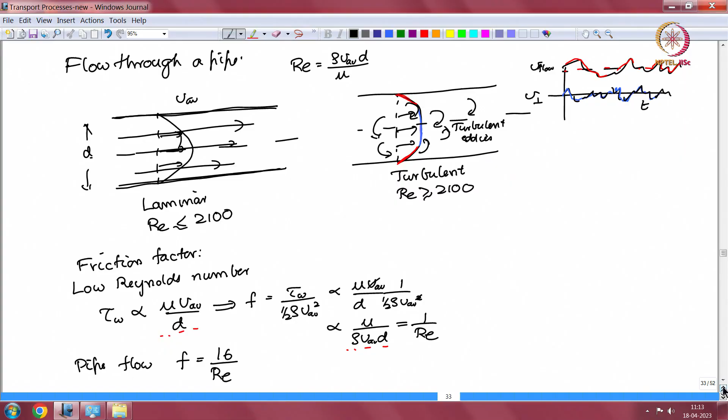So, in the last few lectures we have been looking at correlations for momentum transfer. Momentum transfer in the flow through conduits, we had looked at pipe flow if you recall, where we had distinguished between two regimes, a laminar and a turbulent regime.

What has to be predicted here, the dependent dimensionless group, is the friction factor, which is a scaled wall shear stress, and it is also a measure of the pressure difference across the pipe required in order to drive the flow. That is a function of the Reynolds number based upon the average velocity and the pipe diameter and the fluid density and viscosity.

And just from dimensional analysis, the friction factor is a function of Reynolds number. It is different depending upon the flow regime, whether we are in a laminar flow or a turbulent flow.

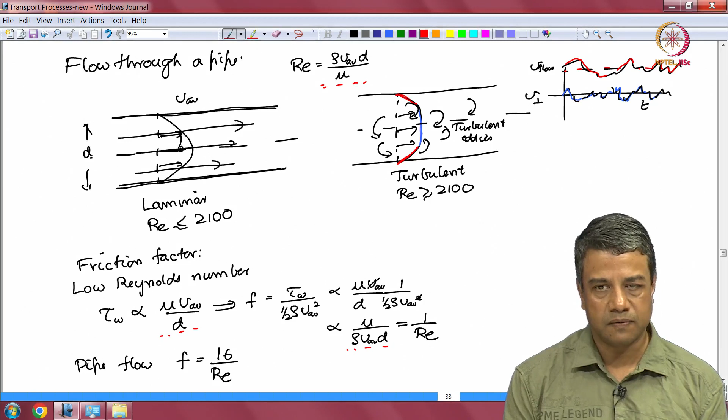Laminar flow with straight smooth streamlines and no cross stream velocity fluctuations, the flow profile is parabolic. Turbulent flow with turbulent eddies mixing across the cross section of the pipe, the velocity profile is more plug like at the center and sharper at the walls, and there are fluctuations in all three directions in a turbulent flow, even though on average the velocity is only along the axis.

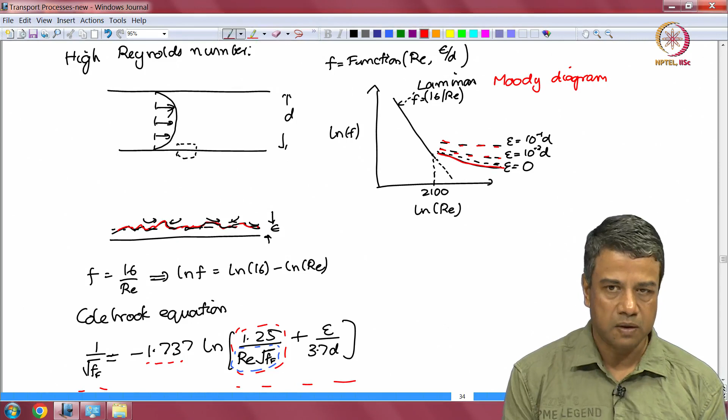And the friction factor is 16 by Re for low Reynolds number, and it varies at high Reynolds number depending upon the wall roughness, and I had discussed a correlation for the pipe flow.

Flow past a flat plate with negligible projected area perpendicular to the flow. The drag force on this flat plate is primarily due to the shear stress exerted on the wall. Once again, the flow regime depends upon the length in this case.

If the Reynolds number based upon the downstream position is less than about 5 into 10 power 5, the flow is laminar. Beyond that it becomes turbulent.

The stress exerted by the plate on the fluid causes a disturbance to the velocity of the fluid within a boundary layer of thickness delta close to the surface. That is because momentum is diffusing from the surface and it is getting convected downstream. Therefore, the effect of the plate is felt only within a boundary layer close to the surface, and we had looked at the scalings for that boundary layer.

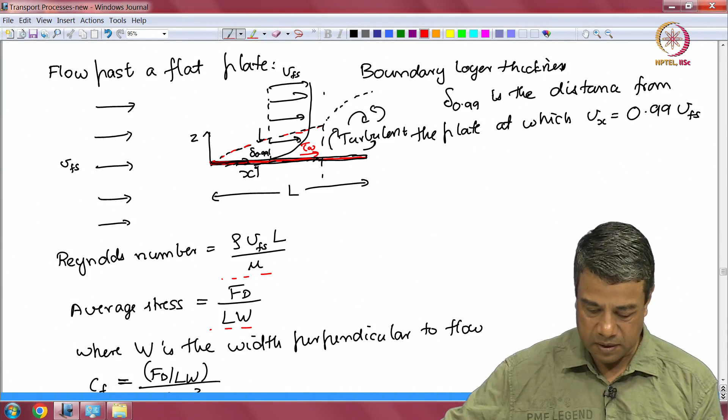It goes as the boundary layer divided by the downstream location scales as Re power minus half in a laminar flow and minus 1/5 in a turbulent flow.

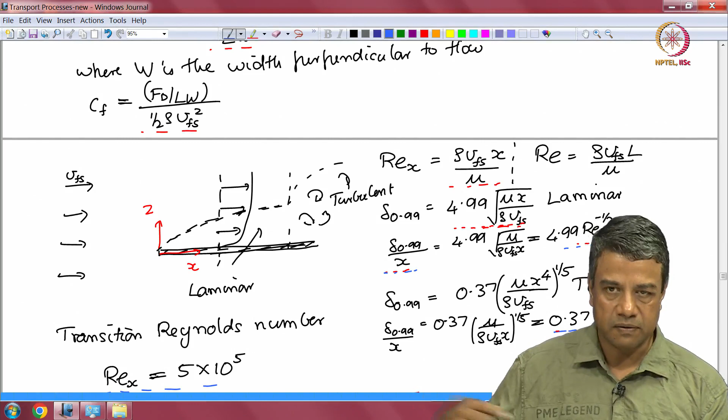And we had also looked at correlations for the skin friction coefficient. The drag force per unit area tangential to the flow per unit area of the surface divided by half rho times the free stream velocity square.

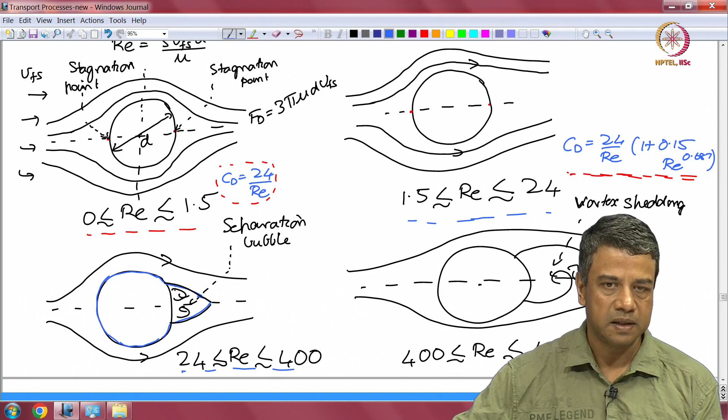We had looked at flow around a particle, the different flow regimes, all the way from the laminar flow with symmetric streamlines between the downstream and the upstream hemispheres, down to inertial effects for Reynolds number greater than 1.5 less than 24 causing an asymmetry, and then there is a separation bubble at the rear.

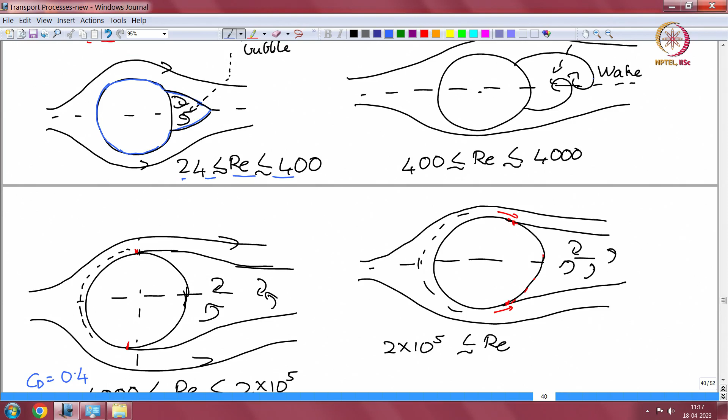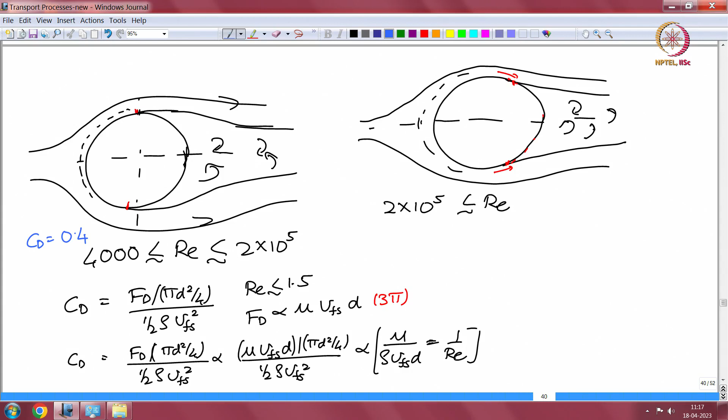This separation bubble, when the Reynolds number increases above about 400, you get vortices being shed periodically in a wake region. Above about 4000, you do not have this periodic shedding, it becomes a turbulent flow in the wake. And when the Reynolds number exceeds 2 into 10 power 5, the wake is turbulent, the attachment points of the wake shift downstream, and you have turbulent flow in the boundary layer upstream as well.

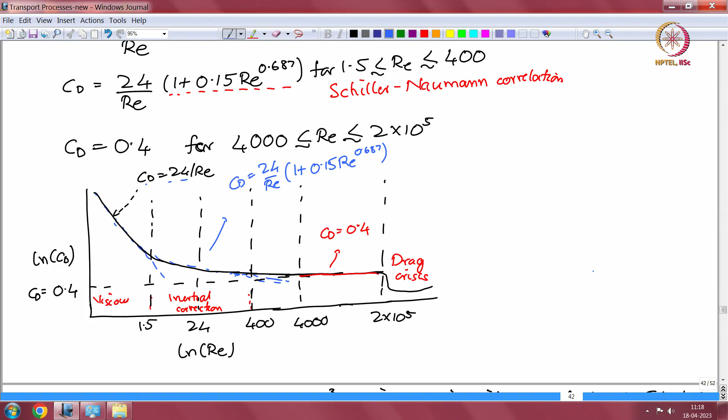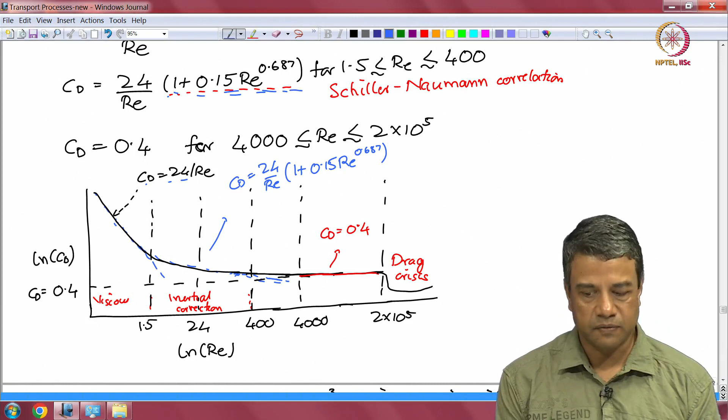And we had looked at the drag coefficient as a function of Reynolds number. Less than about 1.5, Stokes drag law is valid, and CD is 24 by Re. Above 1.5 till about 400, you have a correlation which incorporates the effect of inertia at low Reynolds number. Above about 4000 or so, the drag coefficient is a constant about 0.4, and at 2 into 10 power 5 you get a drag crisis.

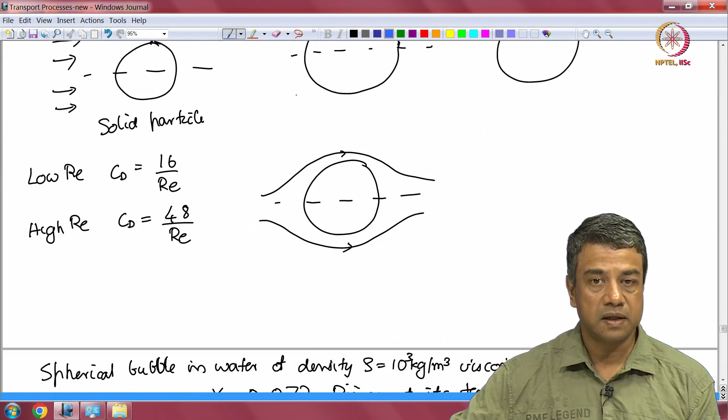The correlation for the bubble does not contain all these complications because the flow profile does not contain all these complications. Provided you are in a clean liquid with a clean interface, no surfactants etc., there is no boundary layer separation and so on.

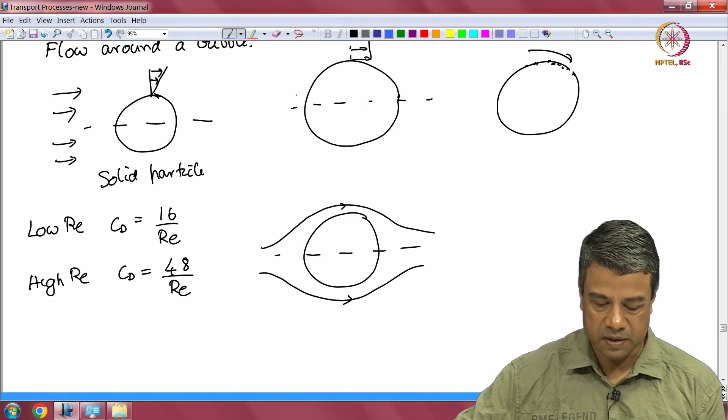The flow can be well approximated by a potential flow, there is no turbulence. At low Reynolds number, the drag coefficient is 16 by Re, and at high Reynolds number it is 48 by Re.

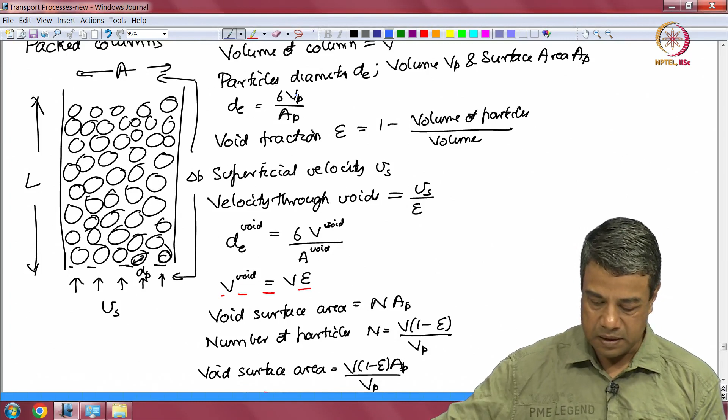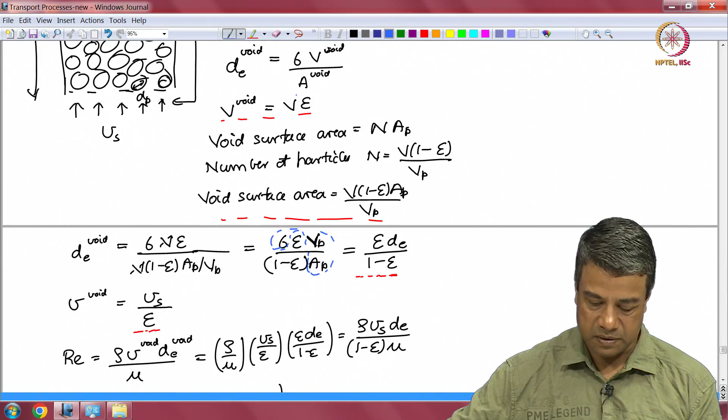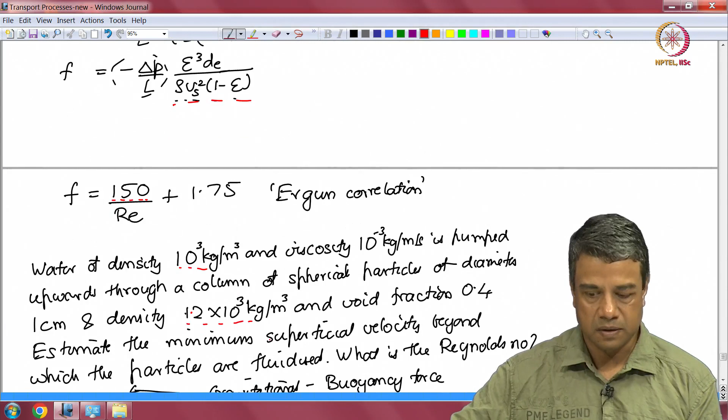And we had looked at the definitions for a packed column as well. One has to be careful in how to define the equivalent diameter and the velocity through the voids. You have to look at the void equivalent diameter and the void velocity, and those are related to the particle equivalent diameter and the void fraction. These are ultimately the parameters used for defining the Reynolds number and the friction factor, and these are the definitions. We had also discussed the Ergun correlation for the friction factor versus Reynolds number in this case.

So now we will look at mixing, an essential component of many unit operations.

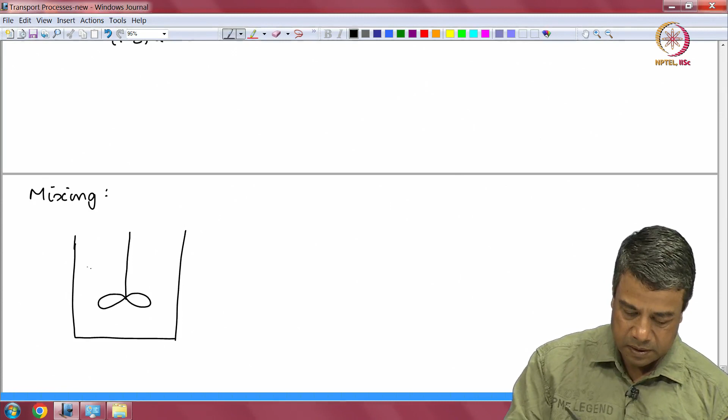Typically, in a reactor you have an impeller that is rotating and mixing the fluid. The design criterion here is likely to be: for a given volume of fluid and for a given impeller geometry and shape, what is the power required to mix this fluid? What is the torque required for this?

A complicated geometry is a priori difficult to solve. So what is usually done is to make a scale model.

In which all the geometrical dimensions are kept constant, that is the ratio of the impeller width to the tank diameter, the length to height, the cross section to the height of the tank, the level of fluid, etc., is all kept constant between these two.

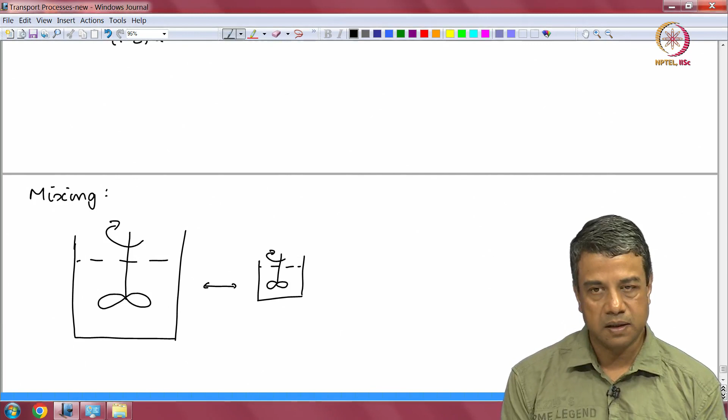And in this scale model, which is maybe 10 times or 100 times less, you would like to measure what is the power required in this model, and then relate it to the power required in the actual system. When you do this, the ratio of all length dimensions has to be kept constant for similarity between these two.

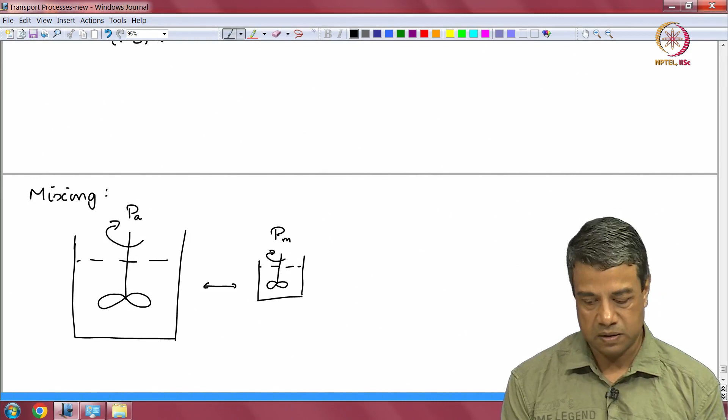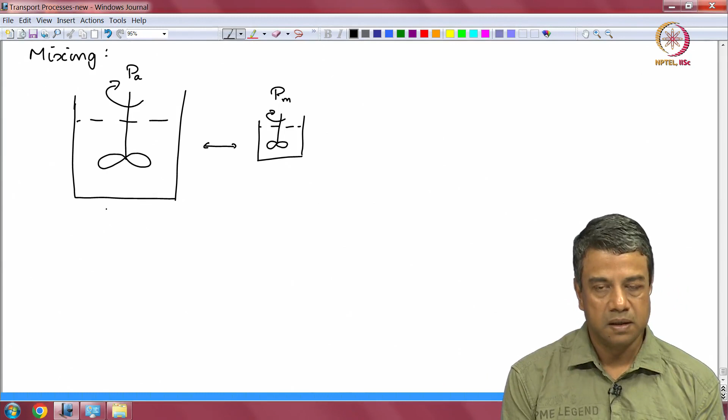However, also to be kept constant are the relevant dimensionless groups. So rather than expressing this in terms of the total power required, you would like to express it in terms of the power number. The dependent dimensional variable is the power required.

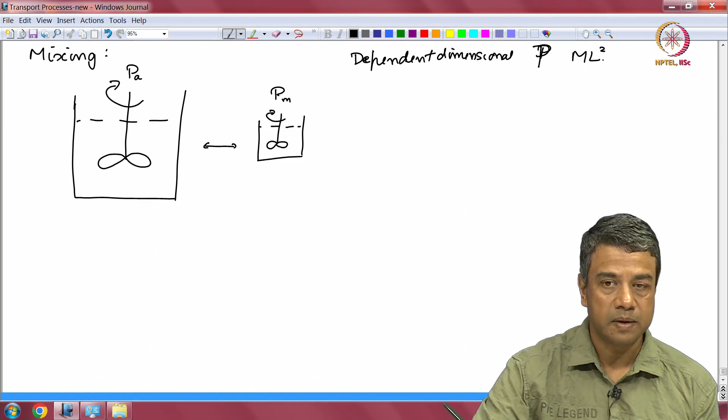That is, the power required in order to drive this impeller. This power has dimensions of mass length squared time to the power minus 2 for energy; power is energy per unit time, so it becomes mL square T power minus 3. Recall that force is mass into acceleration, mL T power minus 2, energy is force into distance, so mL square T power minus 2, and power is mL square T power minus 3.

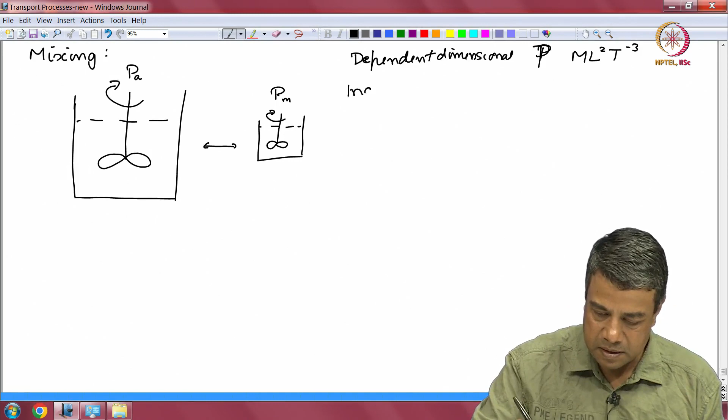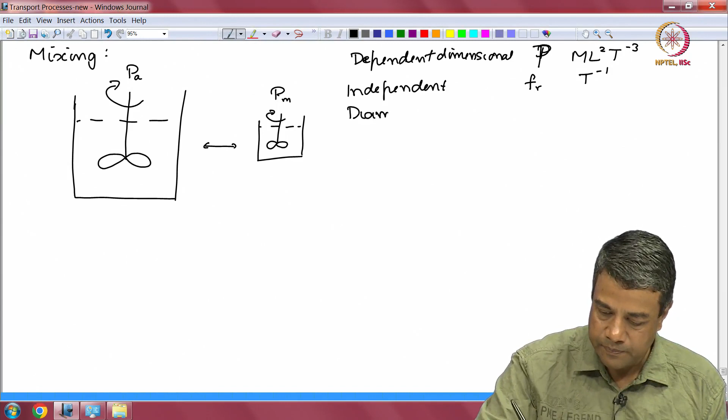This power can depend upon various independent dimensional parameters. It could, for example, depend upon the frequency of rotation Fr, which has dimensions of time inverse, that is the number of rotations per unit time, per minute or per hour and so on, and the diameter d, with units of length.

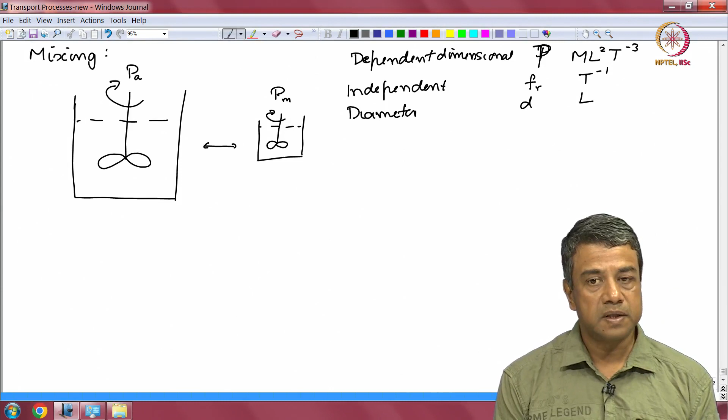And of course it depends upon the fluid properties: the density rho, with dimensions m L power minus 3, and the viscosity mu, with dimensions m, L inverse, T inverse.

So now the power number has to be defined based upon these parameters. There is one dependent and four independent parameters, and therefore there is one dependent and one independent dimensionless group, for scaling the power.

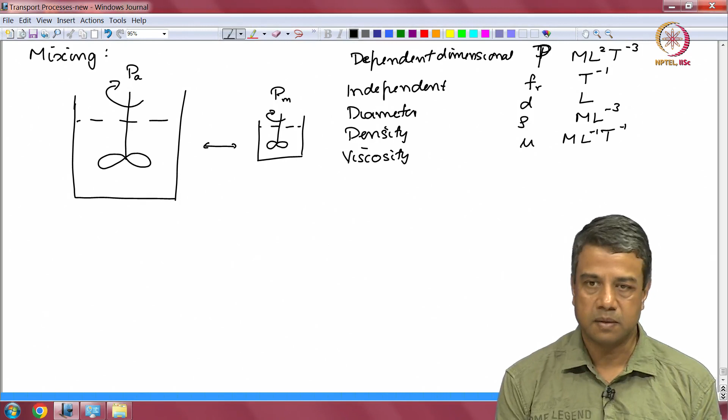In an actual reactor there will be other parameters also that enter, and we will discuss that a little later. So you can scale the power either by the viscosity or by the density. The power number is defined as...

P scaled by the inertial scales, that is by the fluid density rho, the frequency cubed, and d to the power 5. This is the definition of the power number, scaled by the inertial scales. You can see that the denominator has dimensions of mass length square T power minus 3, identical to what we had before. You can also get this simply by dimensional analysis, by substituting P as rho to the power a, Fr to the power b, and so on, and you will get exactly the same thing. So this is power by inertial scales.

You could also scale it by viscous scales. So you would scale it by inertial scales when the Reynolds number is large. So what is the Reynolds number in this case?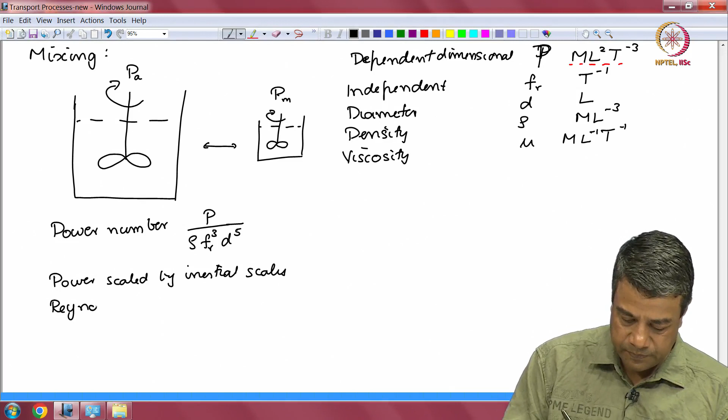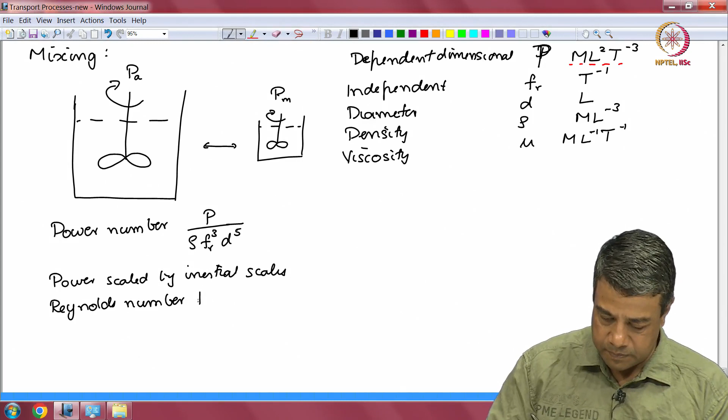The Reynolds number Re is equal to rho times f r d square by mu. F r is a frequency. F r times d is equivalent to a frequency times the diameter, which is the characteristic velocity. So this is equal to rho times characteristic velocity times d by mu, where this characteristic velocity is equal to the diameter times the frequency of rotation. That is how you get this Reynolds number.

When Reynolds number is large, you scale it by this. When Reynolds number is small, you have to scale it by the viscous scales. You can get that quite easily by multiplying the power number by the Reynolds number. If you multiply the power number by the Reynolds number, the density will cancel out and you will get it scaled by the viscosity.

So power number times Reynolds number is equal to P by mu f r into d cubed. That is the power number scaled by the viscous scales.

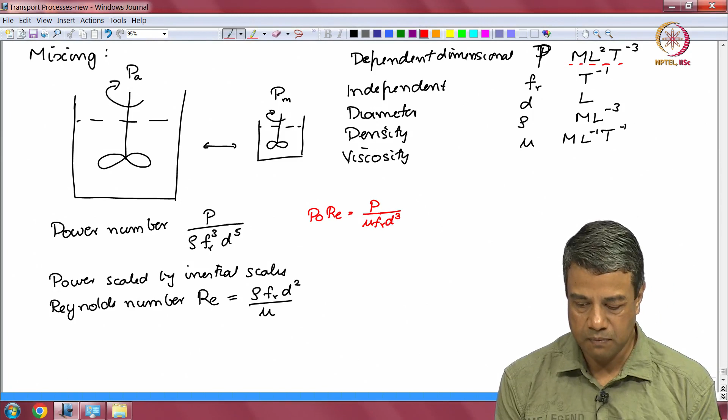So how do we use this in scale up? As I said, we have to keep all the dimensionless groups constant. Let us take an example.

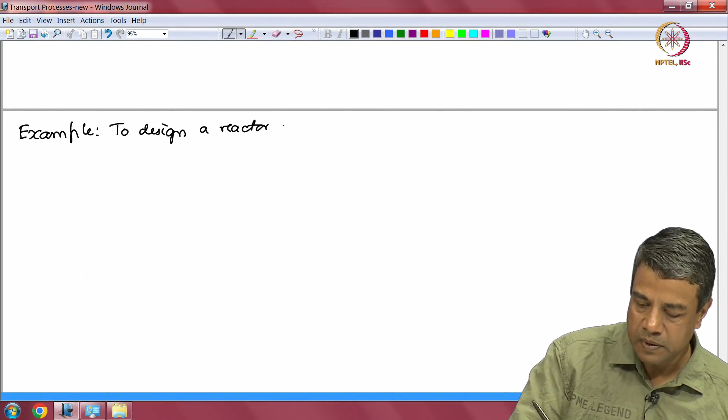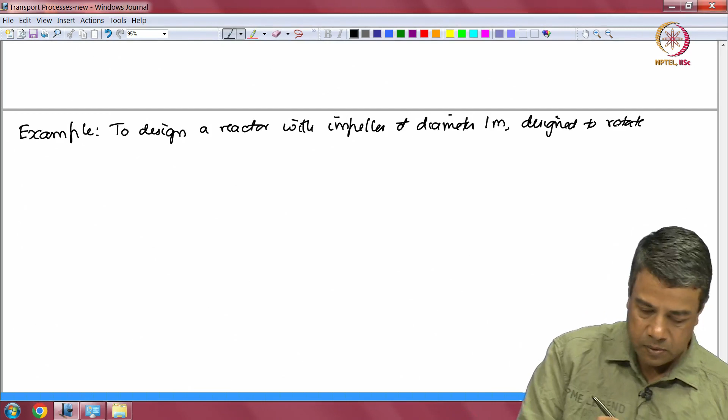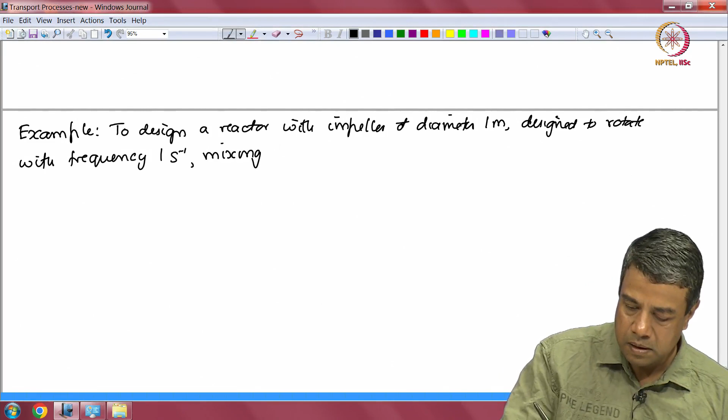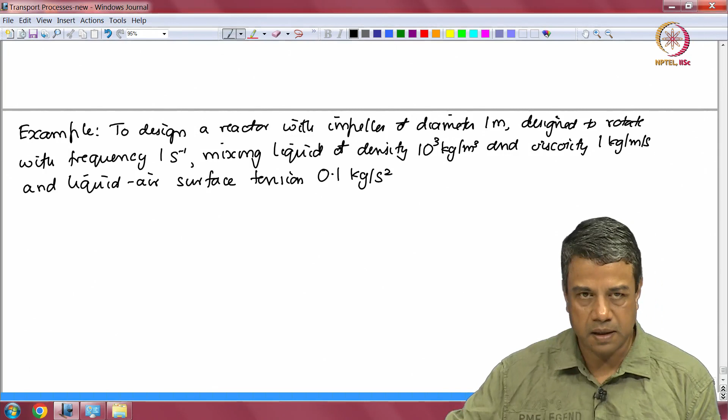A reactor with an impeller of diameter 1 meter, designed to rotate with frequency 1 second inverse, that is 1 rotation per second, mixing a liquid of density 10 power 3 kg per meter cubed, and a highly viscous liquid of 1 kg per meter per second. And the liquid-air surface tension is 0.1 kg per second square. So that is the requirement to design this reactor.

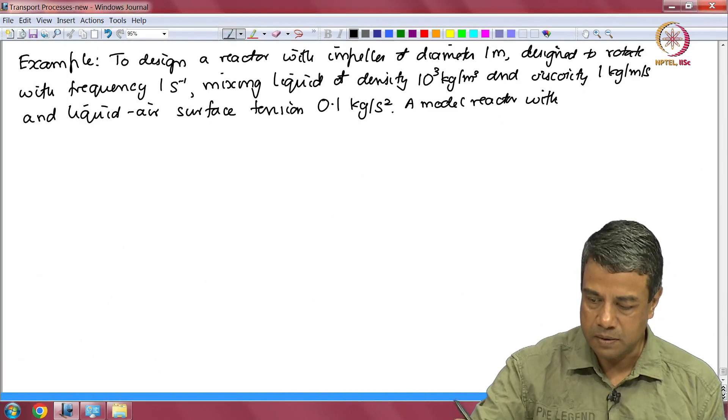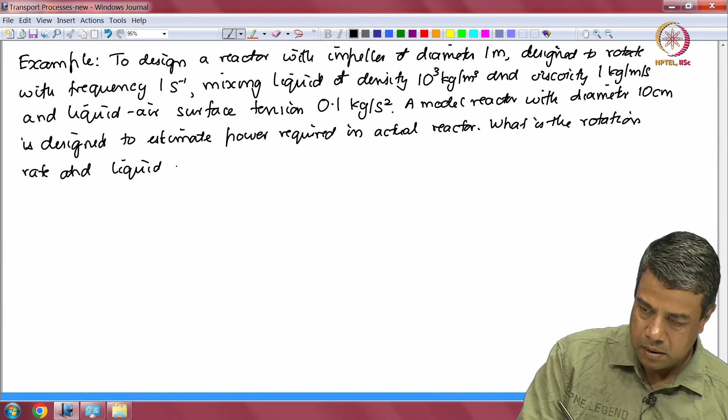A model reactor, this is a scaled down reactor, with diameter 10 centimeter, is designed to estimate the power required in the actual reactor. What is the rotation rate and liquid density and viscosity to be used in the model reactor?

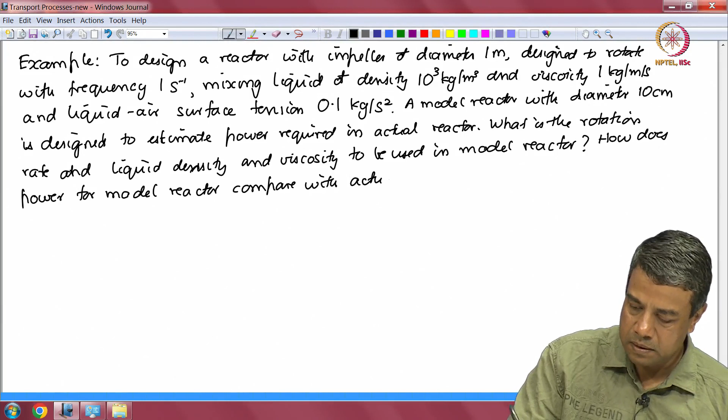So that is the question. What is the liquid density and viscosity to be used in the model reactor? How does power for the model reactor compare with the actual reactor? So those are the questions.

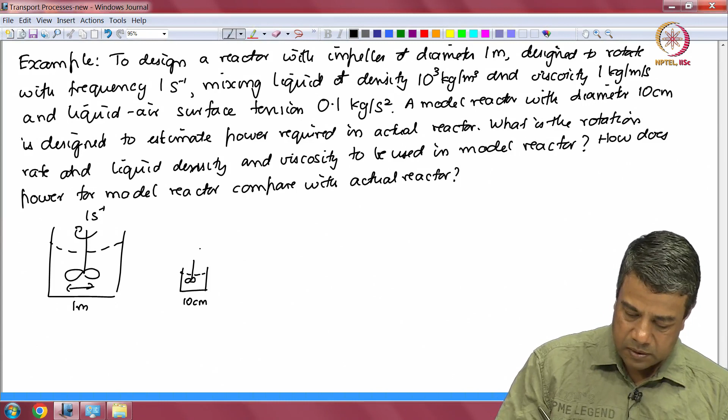So I have a large scale reactor with a fluid rotating at 1 second inverse, diameter 1 meter, and I design a smaller model reactor of 10 centimeter, and it has to rotate with some frequency. How do I relate the frequency and the liquid properties for the model reactor with that for the actual reactor?

The dependent group is the power number, which is equal to P by rho f r cubed d power 5, that is the dependent dimensionless group. The independent dimensionless group is the Reynolds number, rho f r d square by mu.

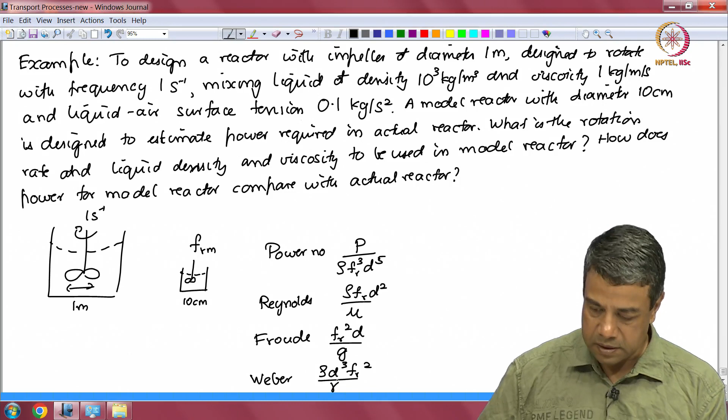The other thing that could determine the shape of the interface is the Weber number, which is the ratio of inertial and surface tension forces. Rho d cubed fr square by surface tension gamma. And we can compare all of these in order to estimate which are the dominant effects.

So, let us look at what is required for the real reactor. The power number we do not yet know, we have to estimate that. The Reynolds number, rho f r d square by mu, density is 10 power 3 kg per meter cubed, frequency of rotation is 1, diameter is 1 meter, viscosity is 1 kg per meter per second. So this Reynolds number is equal to 10 power 3 for the real reactor.

The Froude number, I should correct my mistake here, this is equal to the square root of that, it is equal to square root of fr square d by g. This is equal to, diameter is 1, fr is 1, gravitational acceleration is 10 meters per second square. So, therefore, I have root of 1 over 10, which is equal to 0.316.

What about the Weber number? The Weber number is rho d cubed fr square by gamma. Density is 10 power 3 kilogram per meter cubed. D is 1 meter and fr square is 1. The surface tension in this case is 10 power minus 1. Therefore, this is equal to 10 power 4. So, clearly inertial effects are much larger than surface tension effects, so I can neglect surface tension altogether.

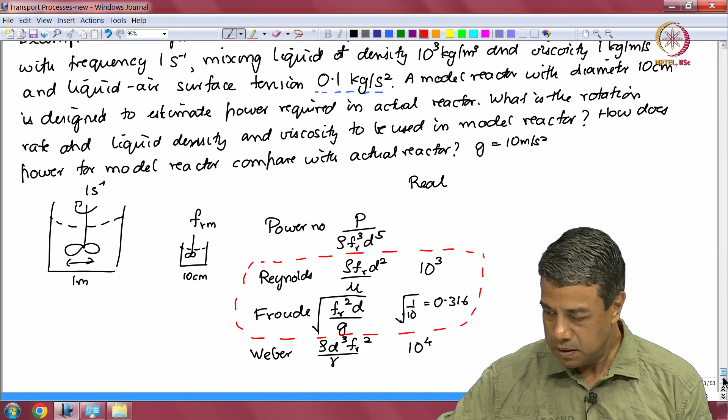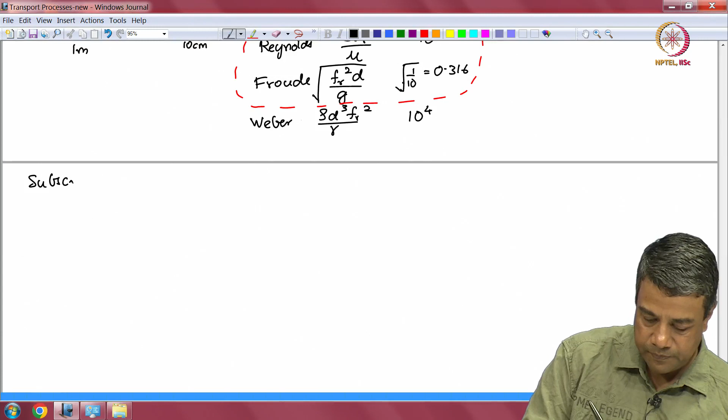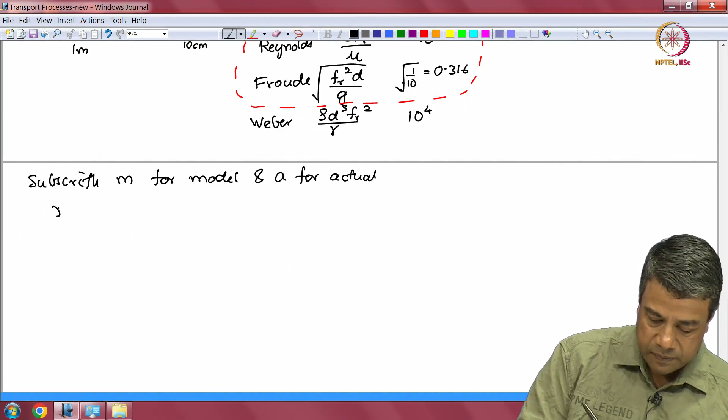Therefore, in designing my scale model, I have to make sure that these things are the same. So, I have to make sure that the Froude number is the same. If I use the notation subscript m for model and a for actual, I require that FRM square dm by g is equal to FRA square dA by g. As the relation between, if the Froude number is the same between the model and the actual, then FRM square, the model reactor frequency square times the model reactor diameter, divided by g, is equal to FRA square times dA by g. G has to cancel out because that is the same on the earth. Therefore, I will have FRM by FRA the whole square is equal to dA by dm.

D actual by D model is 10, because the actual is 1 meter and the model is smaller. Therefore, FRM is equal to square root of 10, which is about 3.16 times the actual reactor frequency, which is approximately 3.16 inverse second, revolutions per second. So, in order to keep the Froude number constant, I have to run the model reactor at about 3.16 inverse second, 3.16 rotations per second, which is square root of 10 times that of the actual reactor.

How about the Reynolds number? I require that rho m dm square fm by mu m is equal to rho a dA square fa by mu a.

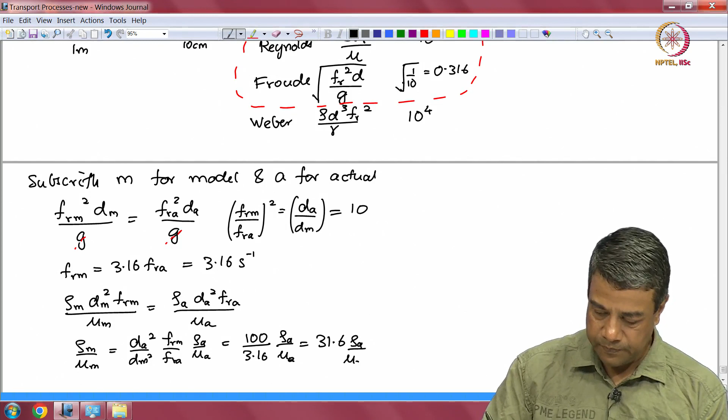Into rho a by mu a, which if you calculate it is 31.6. That means the ratio of the density and the viscosity of this has to be 31.6 times rho a by mu a.

For the system that we have, rho m is 1000, mu m is 1, is equal to 31.6 rho a by mu a, which implies that rho a by mu a has got to be equal to 31.6 into 1000.

So therefore, if the densities are kept constant, then the actual... oh, I have substituted it wrongly here.

Rho m by mu m, the model, is equal to 31.6 into 1000 kg per meter cubed divided by 1 kg per meter per second. And what that would imply is that rho m by mu m is equal to...

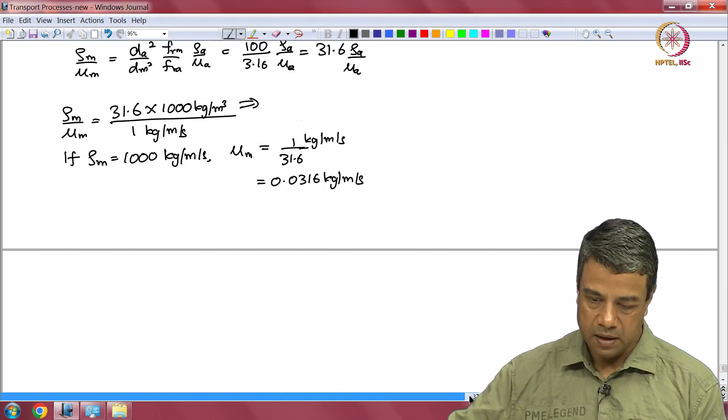Then the result is that the power number is the same between the model and the actual reactor. So if I use a frequency...

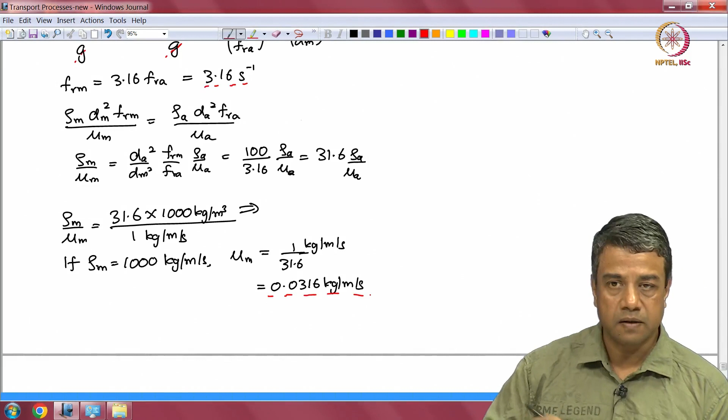If I use this frequency of rotation in the model reactor, this viscosity of fluid in the model reactor, choose the viscosity carefully so that it has the same value. You can do that by mixing different fluids.

Then the power number, P actual by rho actual, d actual power 5, times fr actual cubed, is equal to P model by rho model, d model power 5, fr model cubed.

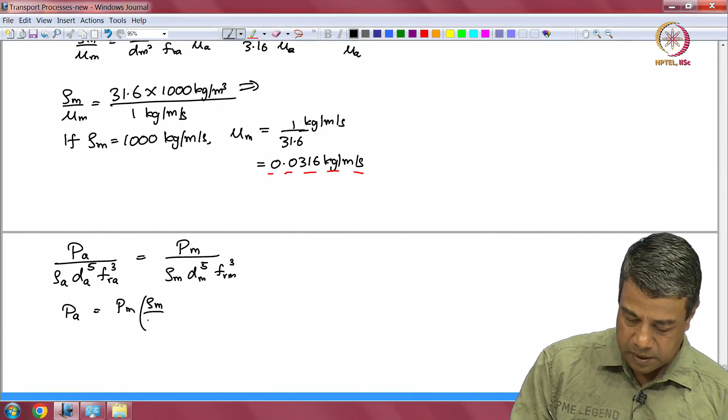So the actual power is equal to P model into rho actual by rho model, into d actual by d model power 5, into fr actual by fr model, whole cubed. I said that the model and actual densities are the same, that means this is equal to 1.

The ratio of the diameter is 10, so d actual by d model power 5 is 10 power 5, and the ratio of the frequency is 1 by 3.16.

Note that we had to rotate the model reactor impeller at 3.16 per second inverse, corresponding to the same Froude number for the actual reactor at 1 per second inverse. So this whole cubed is approximately equal to 3162 times the power of the model reactor.

So this gives you a way of estimating what should be the parameters used in the model system, in such a way that we get the same dimensionless groups for the actual system, and how we relate the model system to the actual system for the problem of scale up of a reactor.

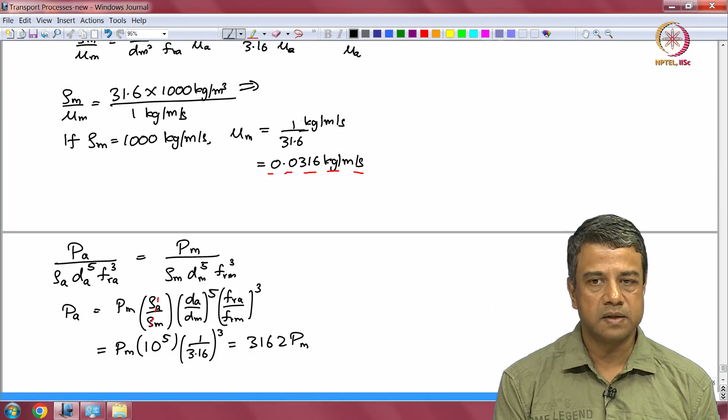So this gives you an example of how to scale up a reactor. Next class I will also discuss how to scale up a mixer. I will continue that in the next lecture. I will see you then.